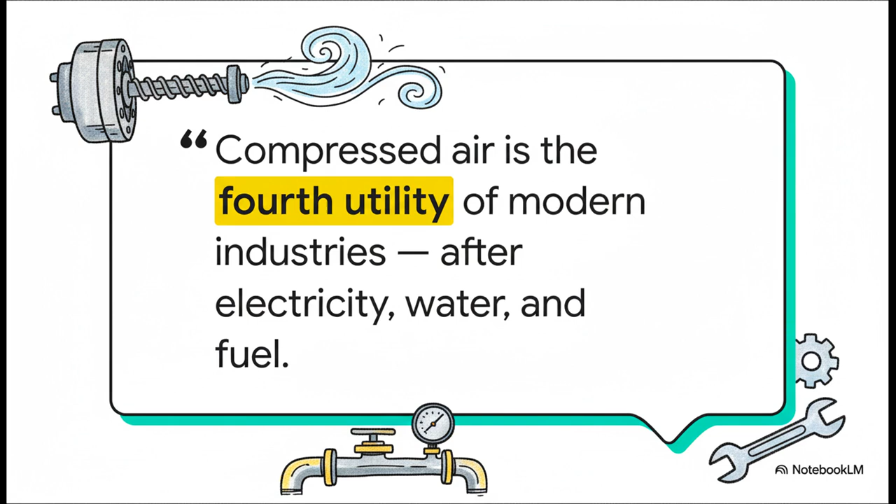Let's start with a really big idea right off the bat. The compressed air that you help create every single day, it's not just a nice-to-have. It's considered the fourth utility. Yeah, right up there with electricity, water, and fuel. It's the invisible force that makes so much of our modern world possible.

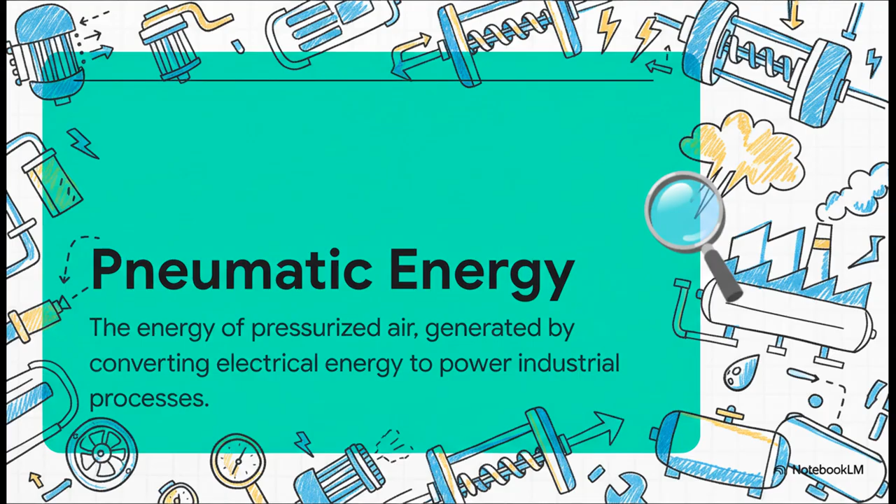So, what is this machine actually making? It's creating something called pneumatic energy. And that's just a fancy way of saying it takes electrical energy from the wall and transforms it into the raw physical power of pressurized air. This is the energy that drives everything from the tools on an assembly line to the systems that package our food.

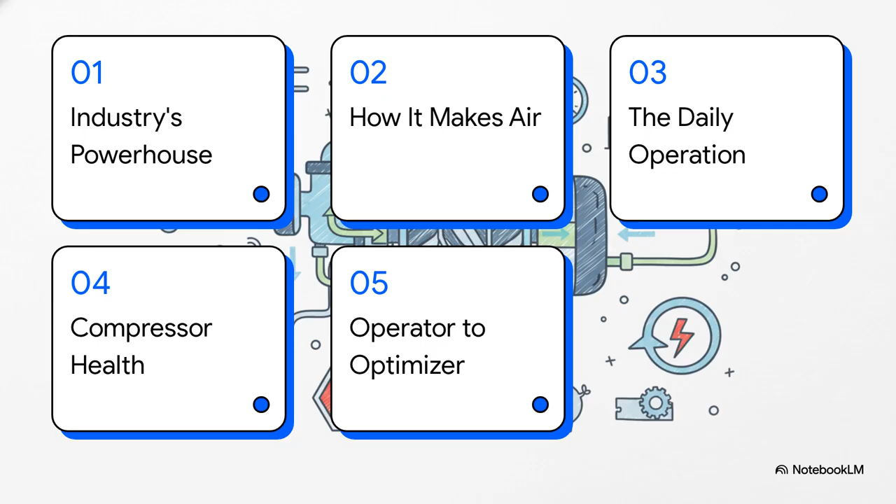So, here's our game plan for today. We're going to go on a little journey. First, we'll talk about why this machine is the unsung powerhouse of industry. Then we'll pop the hood and see how it actually makes air. From there, we'll get into the practical, daily operational dance. We'll cover how to keep your compressor healthy for the long haul. And finally, we'll talk about how you can go from being just an operator to a true optimizer.

First up, let's really understand just how critical this piece of equipment is. Why does this machine matter so much? You know, the reach of the air you produce is absolutely massive. It's in the cars we drive, the clothes we wear, the food we eat, the medicines that keep us healthy. From massive automotive plants to the workshop tools in a local garage, compressed air is the unseen hero. And you're the one who makes it all happen.

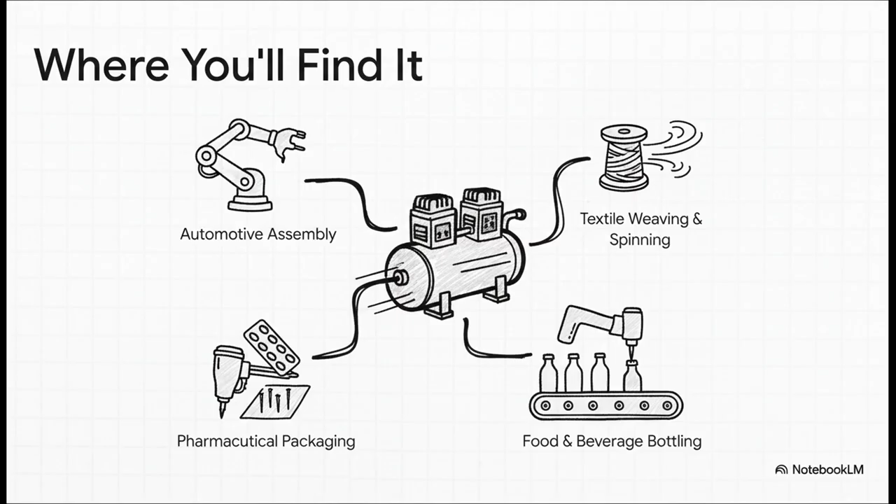Okay, so we get it, it's important, but how does this thing actually work? Let's deconstruct the machine and see what's going on inside. This, right here, is where all the magic happens. At the very heart of the machine, you've got two big helical rotors. Now picture a heavy-duty zipper closing really fast. As those rotors mesh together, they trap these little pockets of air and squeeze them into a smaller and smaller space. It's this continuous squeezing motion that creates the high-pressure air we need.

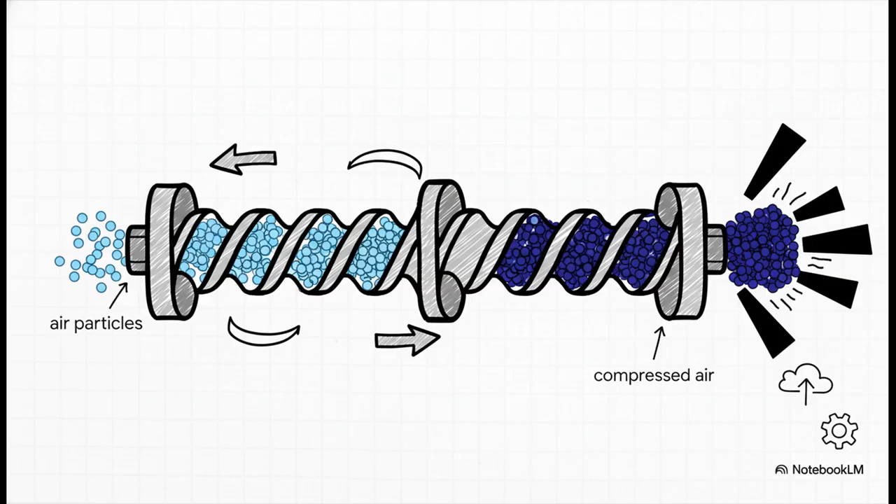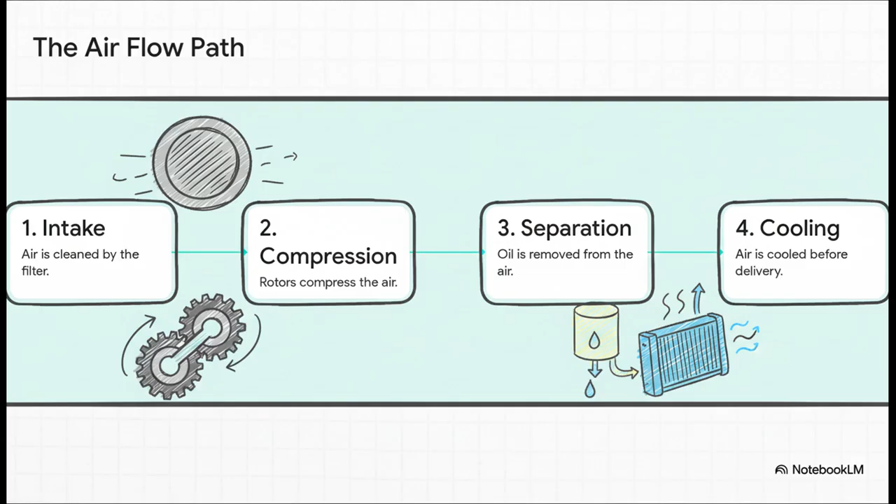So, let's follow a breath of air as it goes through the system. It all starts at the intake, where a filter cleans out all the dust and dirt. From there, it gets pulled into the air end and squeezed by those rotors we just talked about. Next, it goes through a separator to pull out all the oil that's used for cooling and lubrication. And finally, the air is cooled down before it's sent out to the plant. It's a simple four-step dance: in, squeeze, clean, and cool.

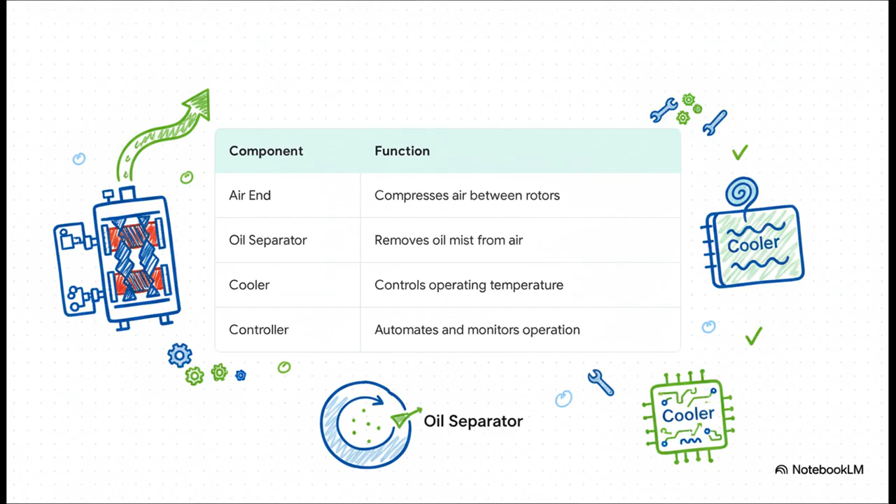Let's meet the key players in this process. The air end, that's the muscle. It's where all the hard work of compression happens. The oil separator. Think of it as the bouncer at the club door, making sure only clean air gets through. The cooler is like the machine's radiator, keeping everything from getting too hot. And the controller? That's the brain of the whole operation, monitoring everything and making sure it all runs smoothly.

Okay, enough theory, let's move from the what to the how. It's time to put it all into practice. We're moving on to the daily operational dance, the key steps every operator needs to have down cold.

A safe and reliable day starts before you even think about hitting that green button. First thing you do is a visual check. Walk around the machine. Are the oil levels good? See any drips or leaks? Are the coolers free of dust? Only then do you power it on and let the controller run its self-test. After you press start, your job isn't over. You watch, you listen as it idles and then loads up. And from then on, you're monitoring the vitals: pressure, temperature, and any sounds that are out of the ordinary.

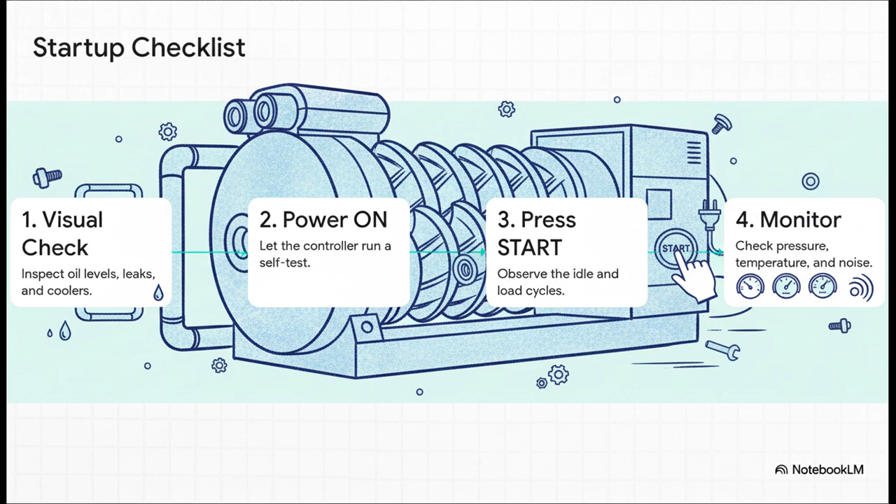And hey, shutting down correctly is just as important. You hit stop and that lets the compressor unload all the pressure. Now this next step is absolutely crucial. Let the machine idle for a minute or two. Think of it like a cool-down lap for a runner. It prevents thermal shock and makes the parts last way longer. After it cools, then you can power it all the way down and drain any water that's collected.

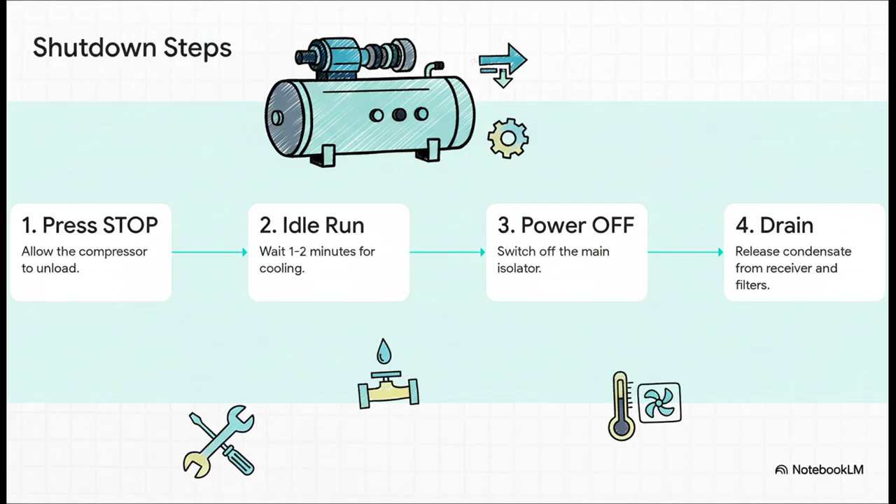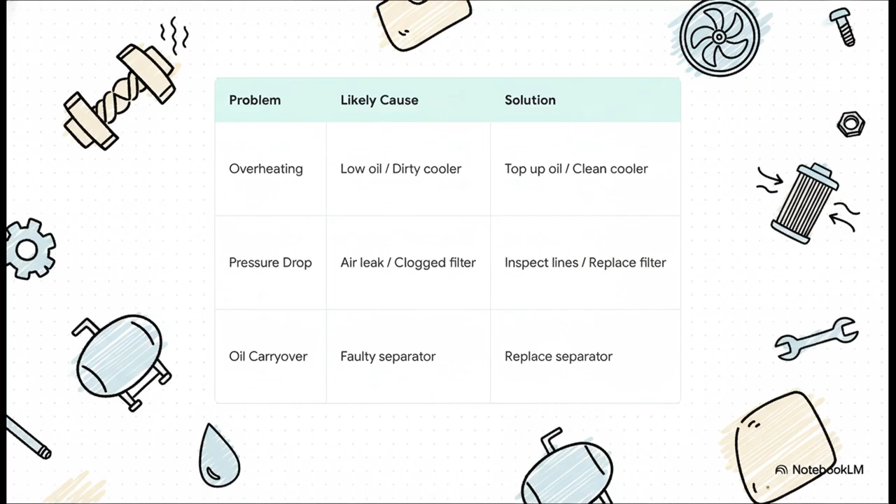Seeing the pressure drop across the plant? You've probably got an air leak somewhere or a filter is clogged up. Your job is to find that leak or swap the filter. And if you notice oil getting into the airline, that's a classic sign the separator element is toast and needs to be replaced. But look, being a great operator isn't just about fixing things when they break. The real question is, how do you stop these problems from ever happening in the first place?

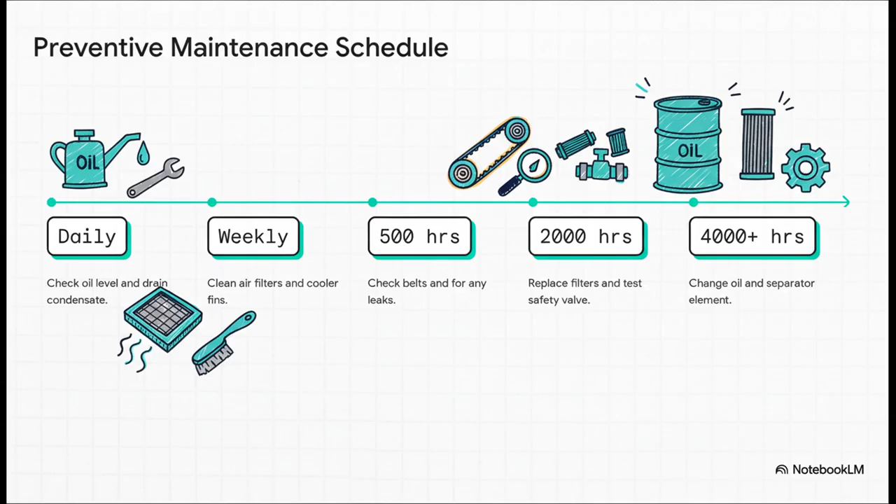Okay, so you've mastered the daily operations, and you know how to keep the machine healthy. Now, it's time to take it to the next level. In this last section, we're going to talk about how you can go from being a great operator to a true optimizer by mastering efficiency.

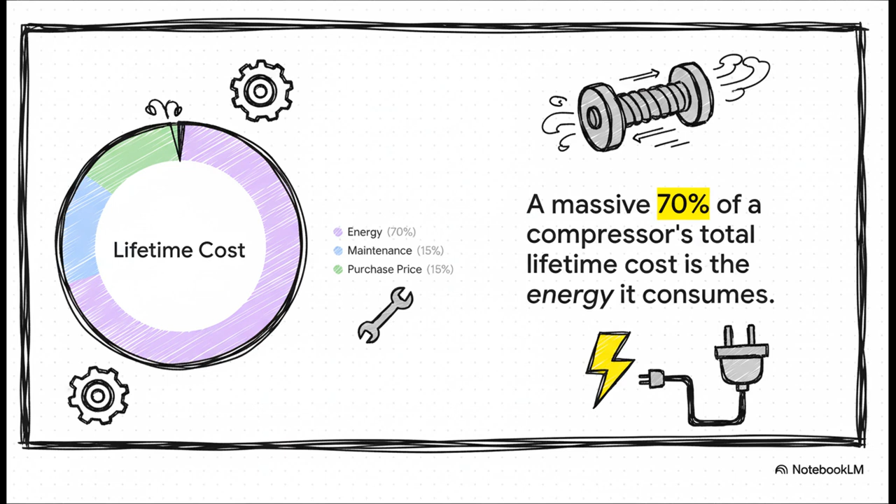This is why efficiency matters so much. Just look at this chart. When you think about the total cost of a compressor over its entire life, the price you paid for it and the cost of maintenance are just small slivers. The real giant, the big kahuna, is energy. A whopping 70% of the cost is just the electricity it eats up. That's where you can make the biggest impact.

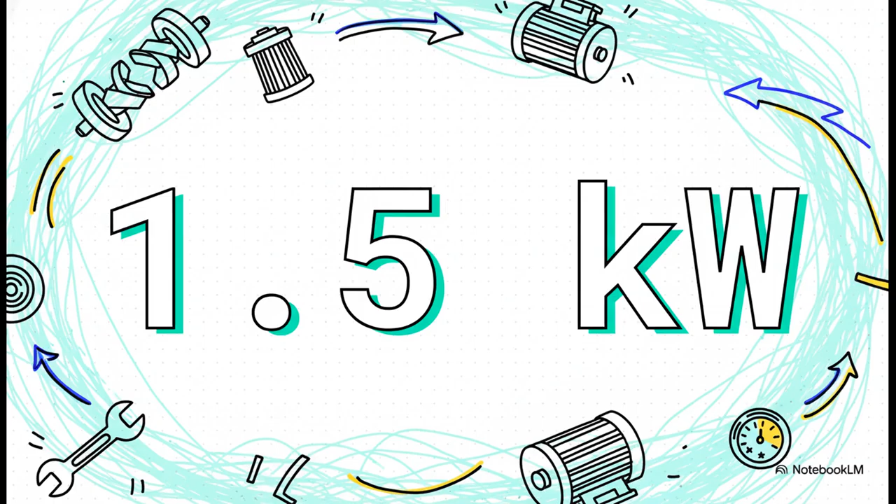And to put that into perspective, check this out. A single tiny 1 millimeter leak in your airlines, a hole so small you can barely hear it, can waste 1.5 kilowatts of power non-stop. That's like leaving a powerful appliance running 24/7 for absolutely nothing. It is pure waste. So, how do you fight that waste? Here are your pro tips.

Become a leak detective. Hunt down and fix every single leak. Keep the compressor room cool because a hotter room makes the machine work a lot harder. If your factory's air demand bounces up and down, a variable speed drive, or VSD, is a total game changer. It matches motor speed to demand, so you're not wasting power. You can even use a heat recovery kit to turn all that waste heat into useful hot water for the plant.

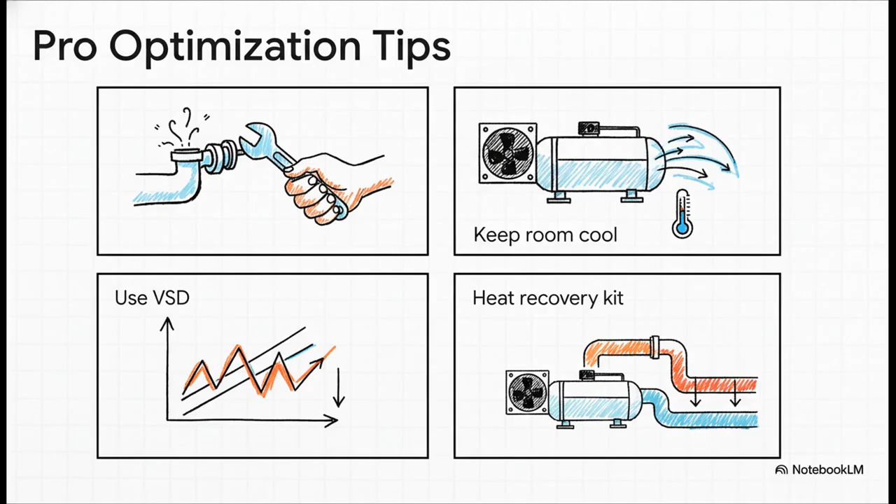So what's the bottom line here? Your role as an operator is so much more than just pushing buttons. It's about stewardship. You are the caretaker of a powerful, important, and expensive industrial asset. And your skill directly impacts your company's efficiency, its reliability, and yeah, its bottom line.

So, we'll leave you with this final thought. You've seen the mechanics, you've seen the procedures, you've seen the strategy. The question now is for you. How are you going to use this knowledge to become an even more effective, more efficient, and more valuable operator when you walk in the door tomorrow?